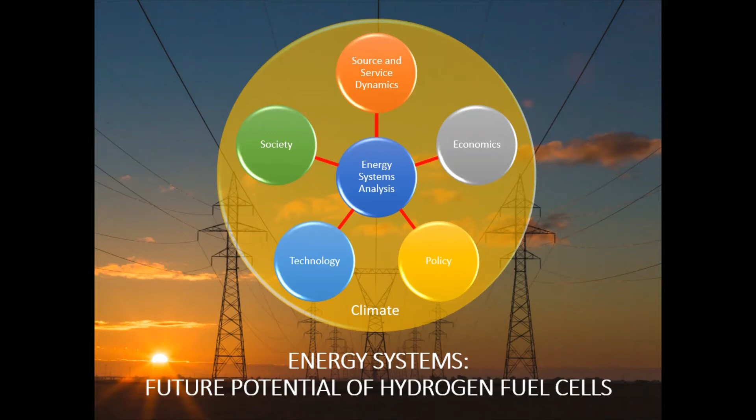Today we are going to talk about the future potential of hydrogen fuel cells. A hydrogen fuel cell uses hydrogen and oxygen to make electricity, heat, and water without the production of CO2.

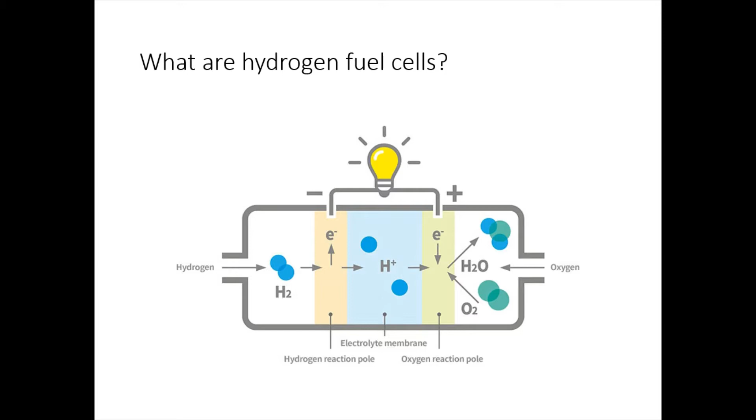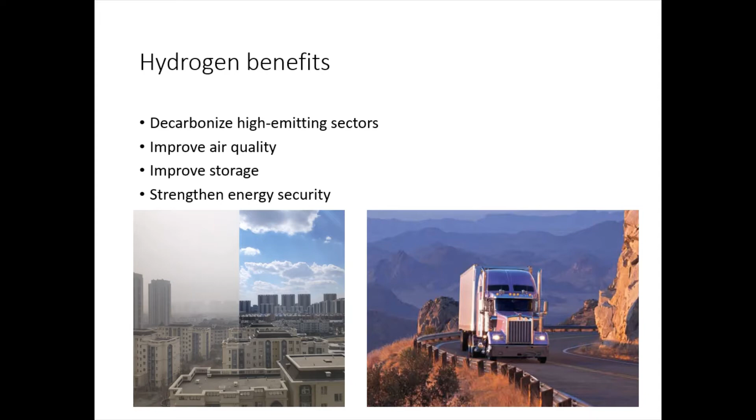The International Energy Agency released a report in 2019 titled The Future of Hydrogen. The report states that hydrogen technology can reduce emissions in high-emitting, difficult-to-electrify sectors, improve air quality in urban centers by decreasing tailpipe, commercial, and industrial emissions, improve electrical storage capabilities, and strengthen energy security of nations who import large amounts of energy.

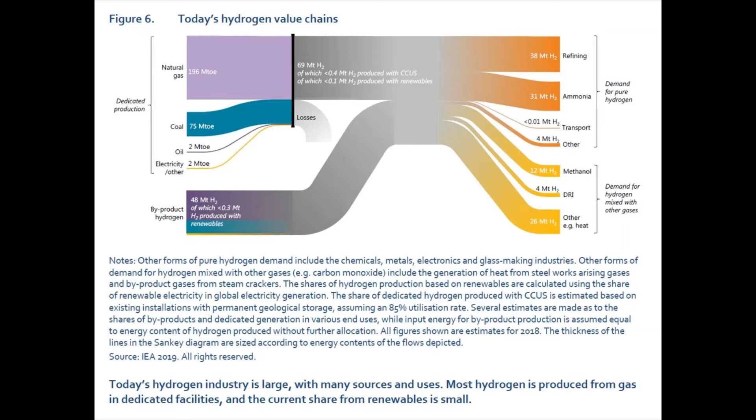The report also states that hydrogen can be produced by many fuel types such as renewables, nuclear, natural gas, oil, and coal, and there is a great opportunity to clean up the production of hydrogen with carbon capture or renewably powered electrolysis. The left side of the diagram shows the hydrogen production and the right side of the diagram shows the hydrogen demands.

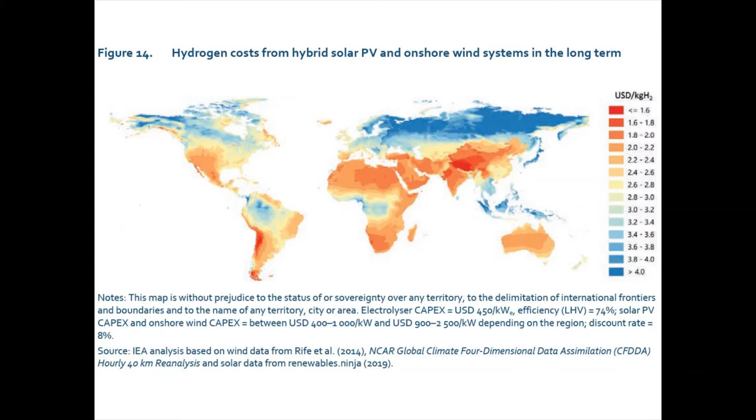The hydrogen costs from hybrid solar photovoltaics and onshore wind systems in the long term are shown in this figure. The red and blue areas represent regions with lower and higher cost per kilogram of hydrogen. The report states that hydrogen creates clean industry for developing nations as well as clean transitions for industry in developed nations.

Recently, there has been exciting innovation in the global hydrogen industry. Germany introduced its first hydrogen fuel cell passenger train in 2018 and has another 14 on the way. In Korea, Hyundai Motor Group aims to produce 700,000 fuel cell systems annually by 2030. In the Netherlands, companies Gasunie, Groningen Seaports, and Shell aim to use offshore wind power to produce hydrogen with a capacity of 10 gigawatts by 2040. In the US, Plug Power has produced hydrogen fuel cells for forklifts and installed fueling infrastructure for giants like Amazon and Walmart.

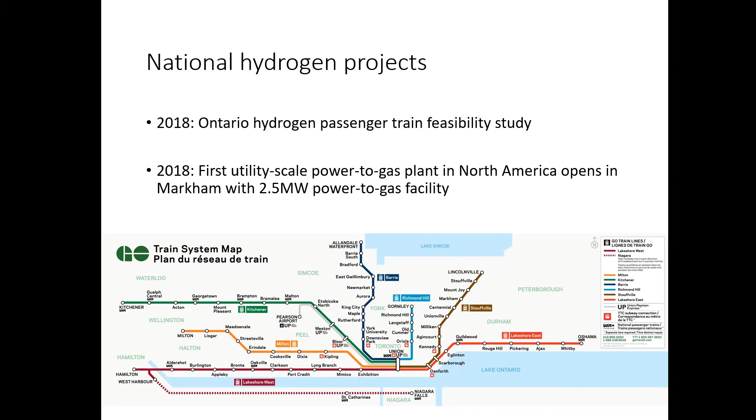Thanks, Matt. Within Canada, a feasibility study to transition the Ontario Go rail network, shown here, to fuel cell trains was conducted in 2018. The study deemed the transition to be both technically feasible and economically comparable to a typical overhead electrification project. Additionally, North America saw its first power-to-gas facility open in 2018 in Markham, Ontario, using up to 2.5 megawatts of excess power from the grid to create hydrogen gas, which can be reconverted to electricity or blended with natural gas to create a cleaner fuel.

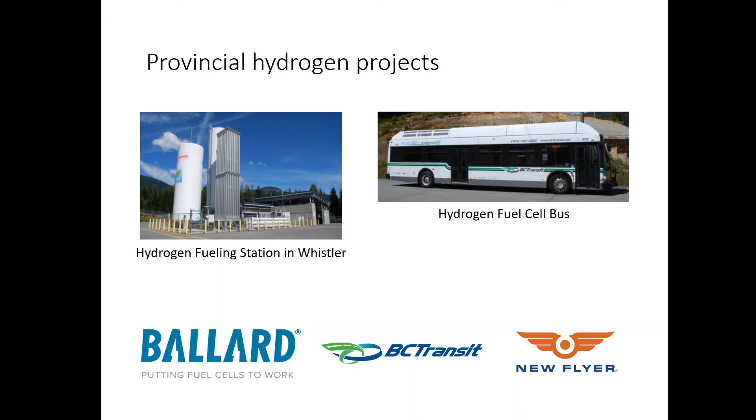In BC, we have the longtime company Ballard Power Systems, who make fuel cell module stacks and backup power systems. Ballard collaborated with BC Transit and New Flyer Industries in 2009 to conduct a 5-year demonstration of 20 fuel cell buses operating in Whistler. The demonstration showed that fuel cell buses can be used to provide daily service in an urban transit operation and can contribute to the provincial government's climate action goals.

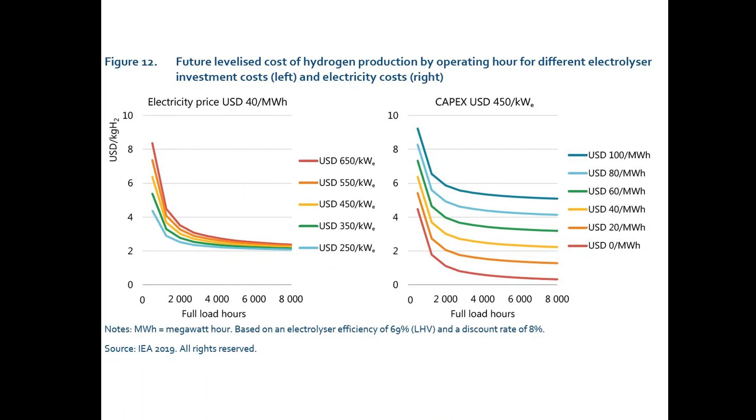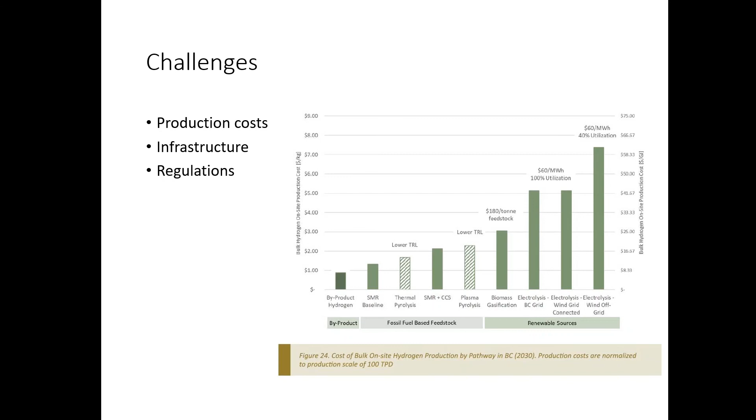There is also a lack of hydrogen infrastructure, making it difficult to build and implement new projects. Additionally, government regulations currently limit the development of hydrogen. Natural Resources Canada claims that the current lack of Measurement Canada approved devices for hydrogen metering and dispensing poses a barrier to retail sales in Canada. Although hydrogen shows promise to play an important role in emissions reduction targets both locally and globally, there is still a lot of work to be done.